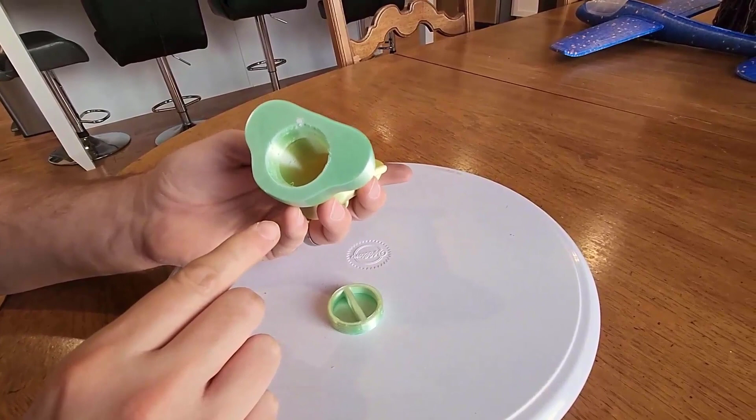And they have different sizes, and it's just really well done. The only thing I did is I took this guy and I hollowed him out with Openscad. And I'll go over that in some a little bit of detail, not crazy detail. So we hollowed him out so you could put stuff in there or hide it.

But then we also did some stuff in Fusion 360. So these threads are from Fusion 360, and we can kind of marry them together, and then we get this kind of cool thing. And it's kind of nice, and I think it looks pretty cool. And with that, let's go over some of the details.

Okay, let's show a few URLs, then go over the numbers, and then go over a little bit of Openscad. Not in great detail, but just a little bit.

Okay, so here's where it comes from, the MOAI. I'm sure I'm pronouncing that wrong. MOAI statue with no overhang is over here on Cults 3D. That's where it originated as far as I know. Now, if anyone ever finds anything where I got it wrong and I'm attributing it incorrectly, just correct me and I'll correct it. So the maker is Julian DeCosto.

I'm sure I'm murdering his name, but it is brilliant, especially for the year it was made. Where's the year? Where is the year? 2017. Ooh, wow. That he thought ahead and did it just brilliant at the time.

It's a beautiful model, and it's also one of those print in place. We have all the angles done correctly where it looks like it's just, I love it. And also right here, it looks like a really cool look. It looks like you took some stone paint and painted it. It looks really cool. I may have to do that at some point. I have some other ideas, but I think this is really cool.

So with this, then there's mine over here on Printables. I put this out on here. So the only difference is I basically took that and I used Openscad to hollow it out and then added a thread in there so I can close it up. It's pretty cool. And then lastly, I did not put this on Printables because I'm debating about this, whether to confuse the issue.

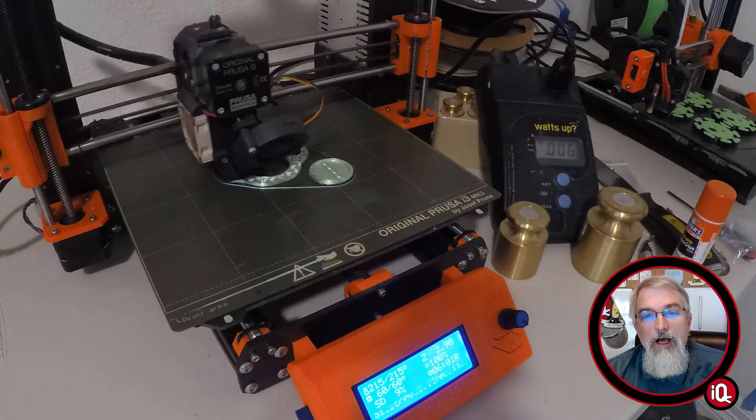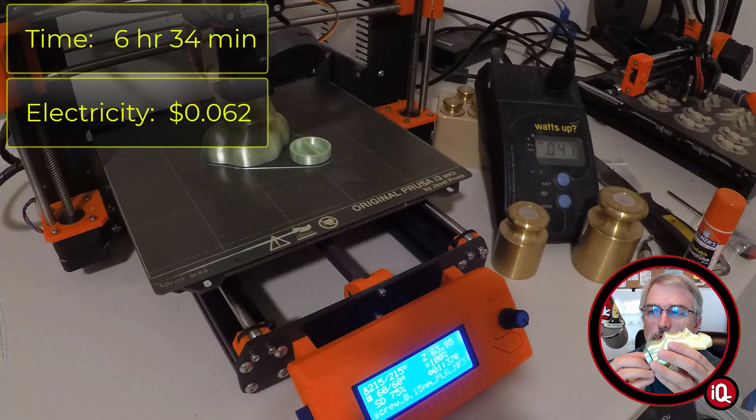Okay, with that, let's go over the numbers. This guy, as is, with a threaded little plug there on the bottom, took 6 hours and 34 minutes to print. It took 6.2 cents of electricity, and it weighs 0.05 kilograms. And at $20 per kilogram, that comes out to $1 worth of material. And the total for this is $1.07.

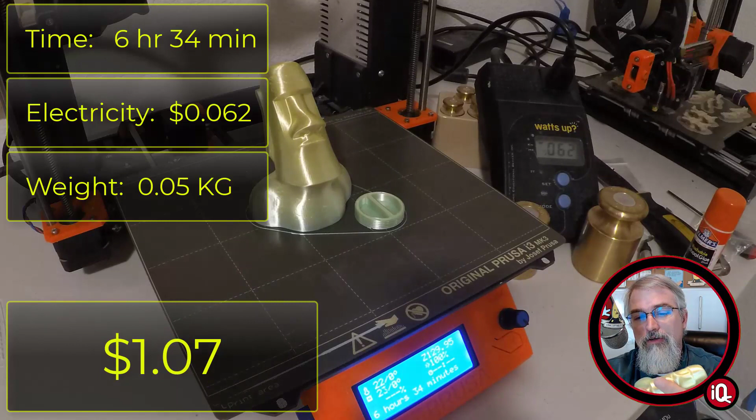And I think he's really cool. I need to do him some more different colors, but I really like this model. I really like turn it into, I don't want to call this a piggy bank because it's kind of small as is, but a place you could hide something, maybe a little secret compartment. Okay, so there's the numbers.

I am planning on doing a giant version of these. If I do a giant version as big as the i3 Mark III can do, I think it might make a good bookend or a doorstop. And if I do that, it will be a separate model, because I like that idea.

If there's something where you're doing 20 versions of something, by all means put it up on Printables with all 20 versions. But if you like a small, medium, and large, or enough differentiation between the two—like in this case a small and a giant—it might behoove everyone to put up two models on Printables, because I think the future is people are going to grab exactly what they want, and they may not want to sift through small versus large. It might make sense if there's 20 of them to put it as one thing versus 20 different printable locations. But if you have a big and a small, I would say put up two. That's what I'm going to do.

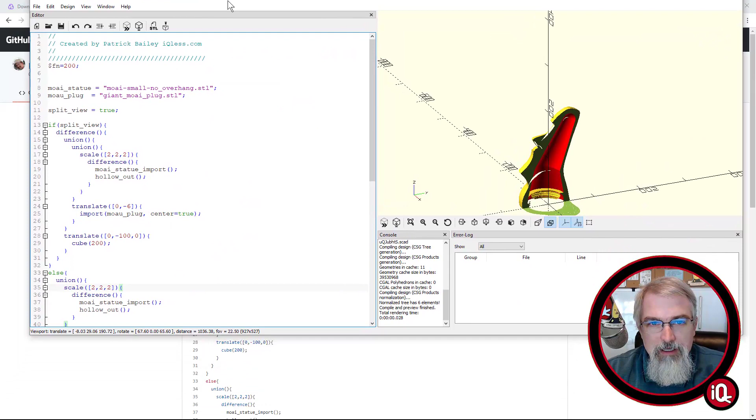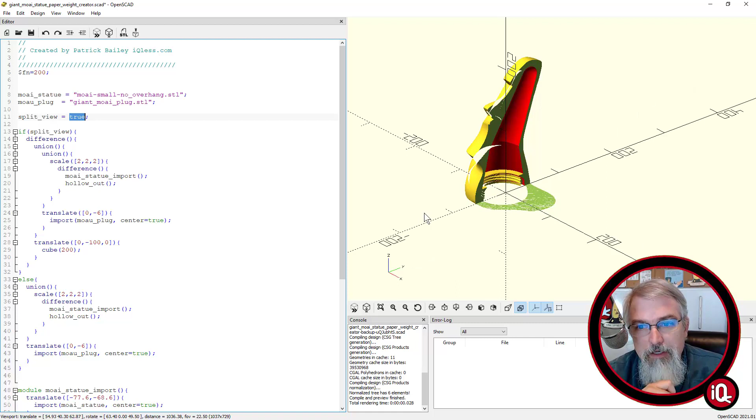Okay, so quickly—and I think this might make a good video to go into detail at some point—here is the OpenSCAD code, and as is, I put it out there with this true split. So here, if you mark this to false, it won't split it, but if you mark it to true, it will. Oh, you know what, speaking of, I don't think I put the threads out there, so maybe I have to go throw the threads out there.

Maybe I should open a sort of Git repository for all these odd parts. We'll see. But if anyone really wants that, bug me and I'll find a way to get it to you, because without it, you just won't have the threads down here.

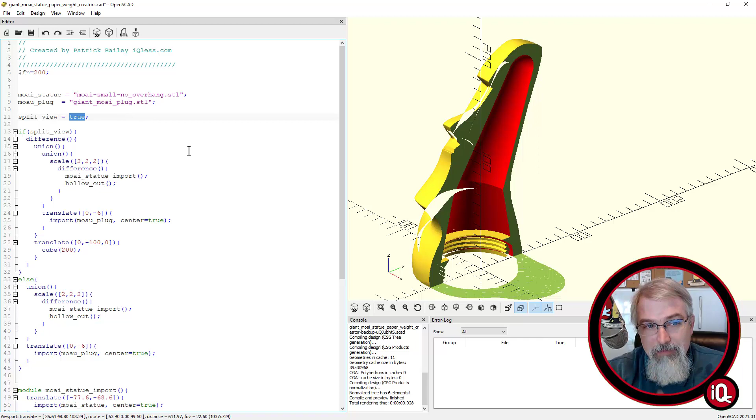So the idea is you hollow this out and you hollow out a big circle here, and then you add in back the threads, which were made in Fusion 360. So it's kind of nice to bring that part in. So if you mark it as false, it won't bifurcate in this half—I added this as a feature, and I'm kind of doing this with most of my models when I'm doing this, just because it's nice to test to see what you did.

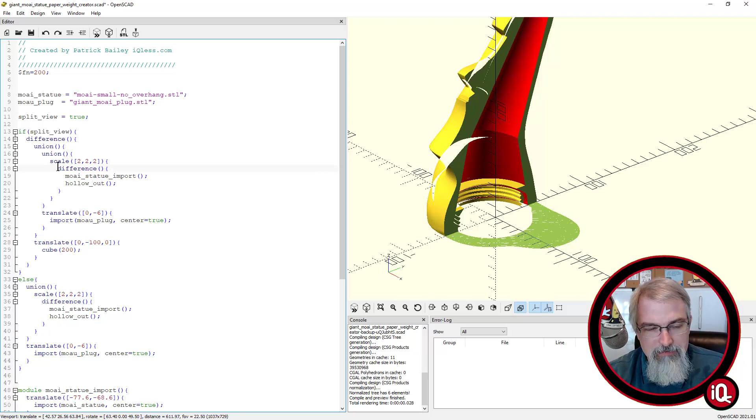Now what I'm going to do is I'll remove this difference here real quickly, and we'll look at—oh, not that one, not that one. Here we go. Here's the MOAI Statue method module, and here's that hollow out. So I'll change the difference in here so that the hollow out will actually show up. And I thought it was a cool idea. I like what I did.

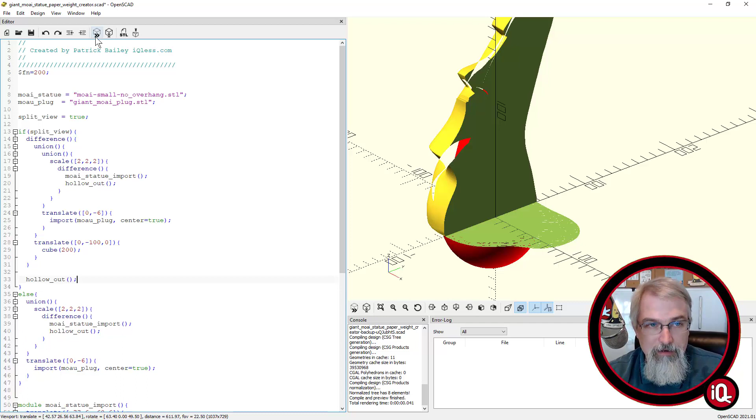Oh, you can't bifurcate it. Oh, you know what, I'll do that, and I'll just add the hollow out later on in here. Throw it back in. So I'll hollow it out, and then I'll add this guy back in just so we can see it, but you're a different size.

Okay, almost. Okay, scale. Boom, boom, boom. Scale 2, 2. Oh, okay, so I have to scale it. Okay, let me do that, and I'll just copy the scale. And I think we'll be good.

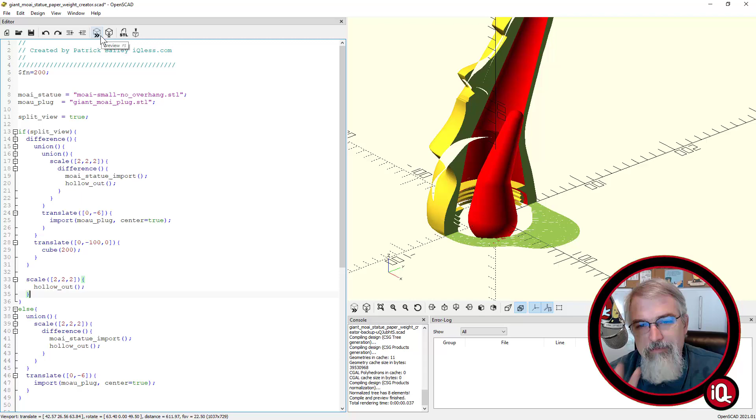Boom. Oh, this is the giant MOAI. Oh, this is my giant version. Code's the same, just scaled. I added scale, that's why it looks funny. Okay, so same idea—the actual code out there shouldn't be the giant one, it should be the regular one. But the only difference is the scale.

But also when I scale it up, I have this idea, and I may be wrong, I may be right—I don't want to scale threads, because in Fusion 360 you can get these really precise threads that are exactly modeled correctly. So what I did is I went in Fusion 360—as an example, this is not exactly what I did—in the smaller one, let's say I made a 15 centimeter diameter thread. In this one, I made a 30 centimeter diameter thread, which applied the threads exactly as I wanted, versus just doubling the size, which probably works well enough, but I'd rather do that since it's easy enough to get the precision, so I do.

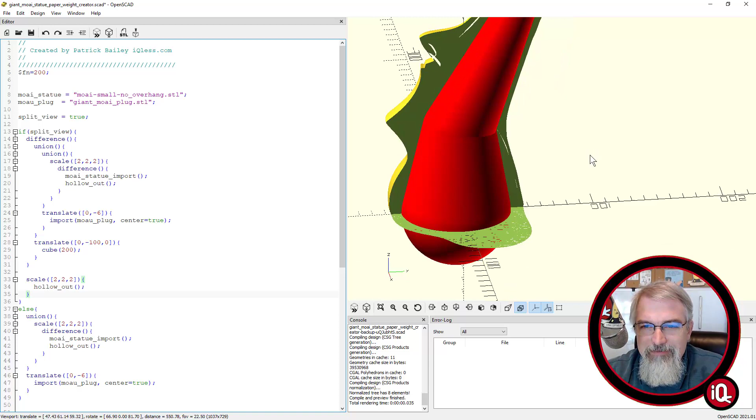Okay, so here we go. So I like this idea for hollowing it out. Let me go down to the hollow out section. For those who have seen some of my past videos, in OpenSCAD you can do hulls.

A hull can be done on a two-dimensional plane where you take 2 circles and they'll attach. If you add a third, they'll all attach, or you can do them in series. But if you do them in series, here's a hull, and then here's another hull, and the last object in the first hull is the first object in the next hull.

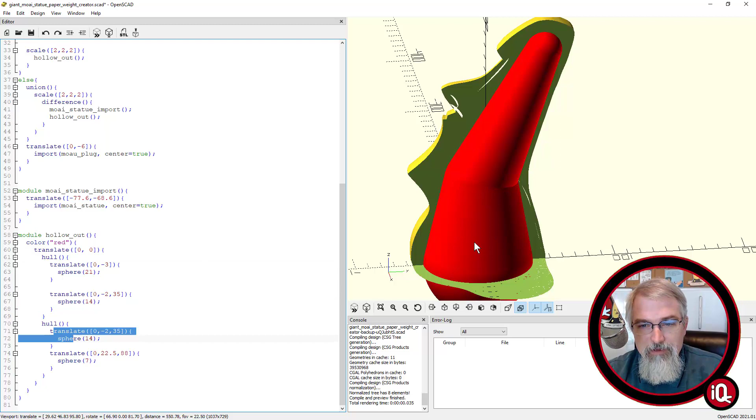So I have this set up, let me use some code here, let's see if I can comment this out... probably shows it nicer. Okay, so that first part, what I did is I made 2 spheres.

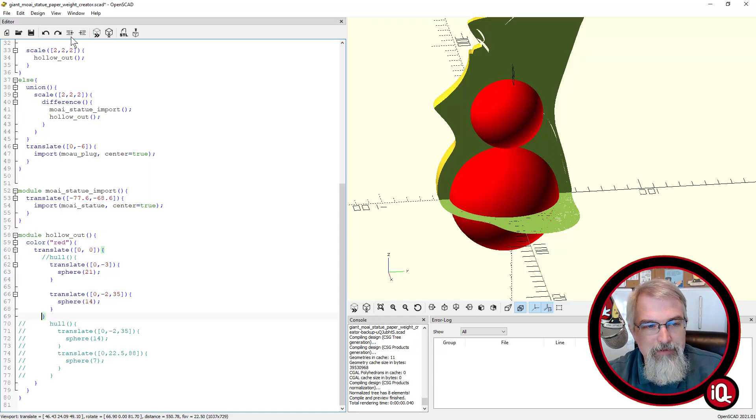If I comment out this hull, I made 2 spheres, and then you do a hull between them, and that actually works pretty good with this MOAI, kind of how the shape is. I had to go tweak a bunch of different sizes and move it in X, Y, and Z to get exactly where I wanted. But then, boom, you got a hull.

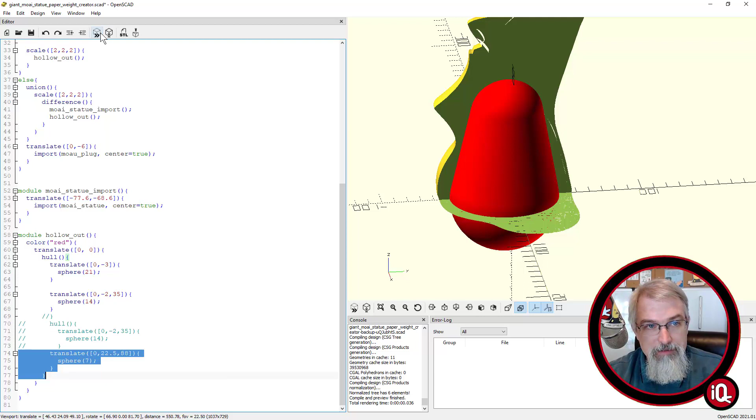Now for the next thing, I used that smaller sphere on top and put it in the exact same place, because if I do all 3 together, for example if I comment this out and bring in that last guy, it's going to look funny.

It'll try to attach them all together, and so that hull will wrap around. So instead we do it in series, the first section, then the next section. Otherwise you get that weird wrap, and maybe in some cases you want that, but in this case I don't.

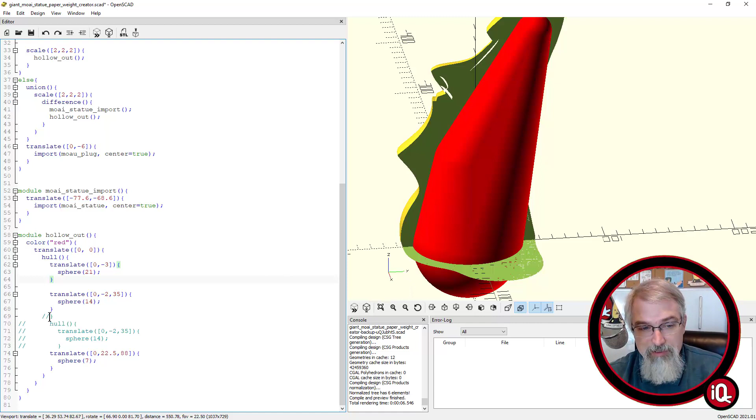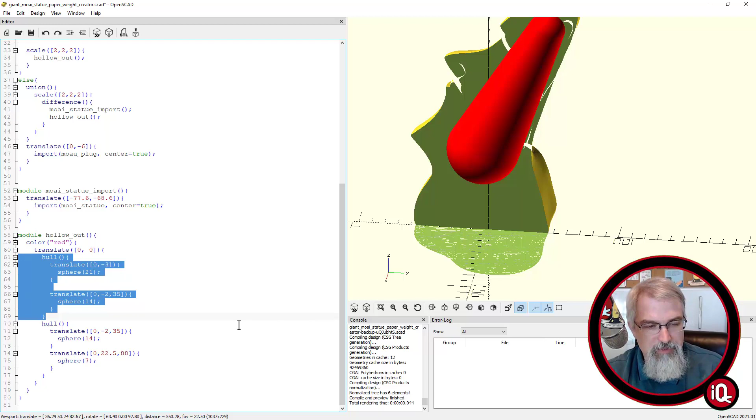So let me go show the next section, Control D, boom, and there's the next section. So I kind of like that, you know, 3 spheres. That was pretty easy to work with, and then boom, I got this whole thing, and it worked really well. The file's out there on GitHub, so you can go fiddle with it.

Let me go remove this extra one. Boom, and there you go. But the threads aren't done yet, that might be something to go fiddle with.

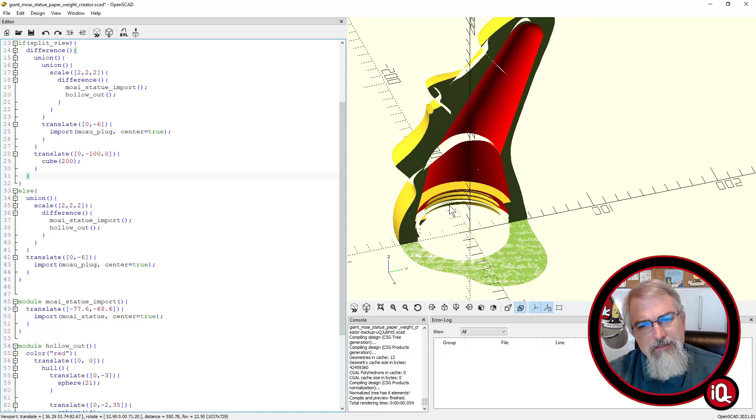Go in OpenSCAD, make some threads, make that object, and bring it in, test for yourself to see how you can do it. So anyway, I'll probably do some more details on this, but I don't know.

I like this MOAI, but I'm going to make a giant one. It's going to be cool. I think it'll make a good one - well, I went to the bank and got a bunch of pennies for the rock biter that I recently made. He's pretty good, I like him.

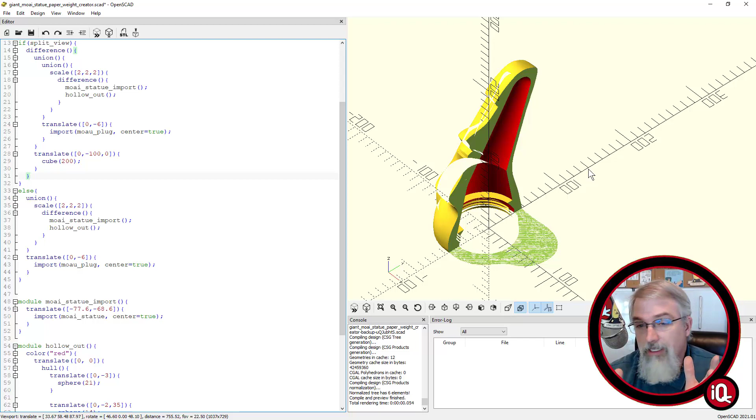But I think I want to also make a giant MOAI. I want to see how many - the rock biter, giant size, I can get about $10 in. I got a feeling this cavity in here for a giant size will be bigger than the rock biter, so I think I can get more stuff in it.

So with that, let's wrap it up.

I have not yet printed out the giant MOAI statue, but that is coming up soon. Once I print it out and confirm it's good, I will post it and put it up on Printables. In the meantime, I made a MOAI statue fridge magnet, and I think it's pretty awesome. That's posted on Printables, you can go download it right now. I think it's a really good one.

I'm going to need to make a few more of them for the homeschool conference. I think they're going to be a big hit.